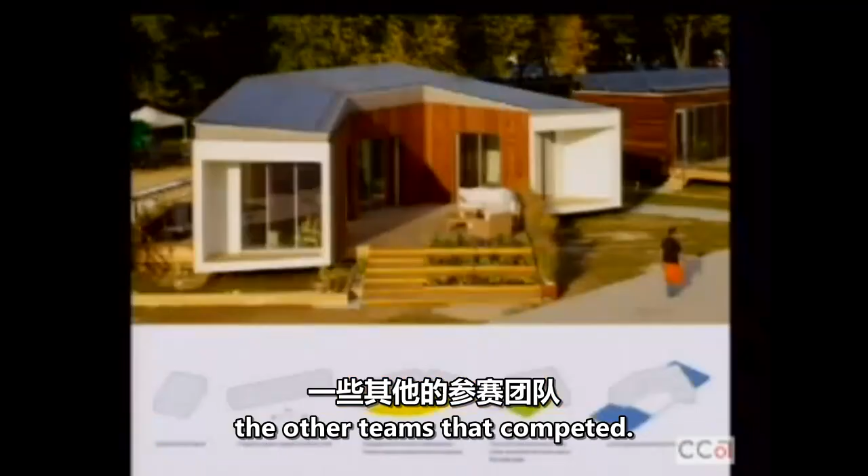Our house was made up of 3 modules, and if you looked at some of the other competitors, they're pretty much boxes, with 1 or 2 exceptions in this year's competition. They're rectangles, and there's something to be said for the rectangle in terms of efficiency and modularity for transportation. But we tried to take those 3 shipping modules and bend them around the central courtyard you see here, really promoting the central courtyard space, thinking of that as the 4th room.

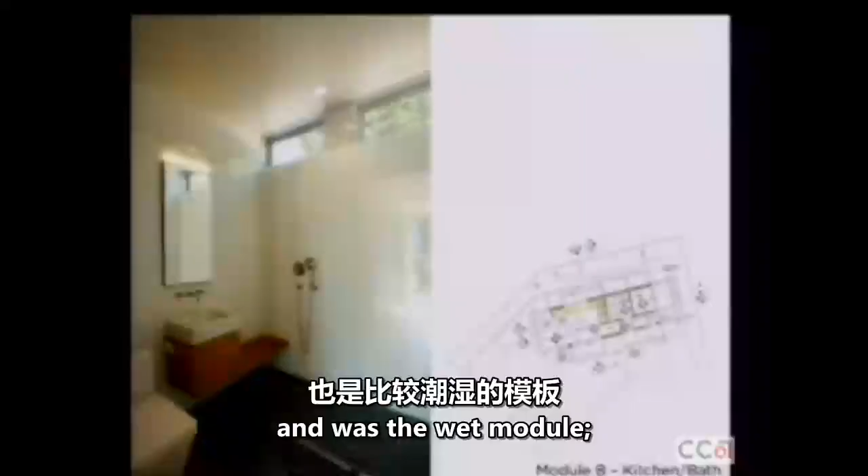So each of the modules has a primary living function, the courtyard was the 4th room, and each of those modules opens out onto that courtyard. The courtyard then extends the landscape and makes the site on the mall, which was kind of a tabula rasa in many ways. So 3 modules: Module A was the living room, opening out to the courtyard. Module B was the kitchen and bathroom, as well as the mechanical room, and was the wet module. Module C was the bedroom.

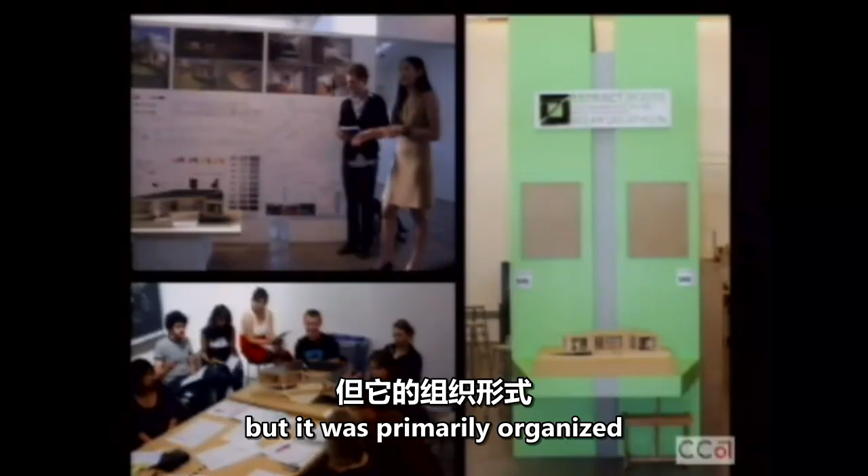This was a process that was 2 years in the making. There were a number of different studios and classes that both directly and indirectly worked on the project, in small scale seminars as well as studio courses. We actually took over a part of the nave and were allowed to paint it briefly - not a very nice color, but it was identifiable - and so we created a real identity through the teaching of the courses. Our partners in the project, Santa Clara, used it as an extracurricular activity for their students, and there was certainly a lot of extracurricular involvement from our students, but it was primarily organized through the teaching functions here at our school, which was an interesting part of merging things together.

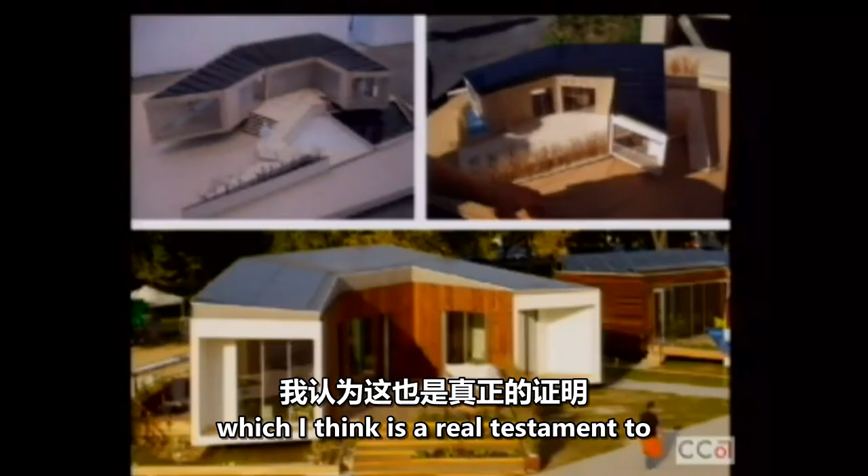So to start with the idea of how directly it evolved: from very early conceptual models in the very first studio, taught by Andrew Cudlis, and the student projects that came out of that, it went through a number of permutations. The interesting thing is how closely the original concept stayed, which I think is a real testament to the strength of the original concept of the house - the bending of the house around the courtyard. Going from the original conceptual model to the final built structure, there are many changes, and Kyle will take you through a few of those. But through all those changes, and all of the different hands of the hundreds of people who worked on the project in a collaborative, creative way, we ended up with a project that flowed very directly from the original idea.

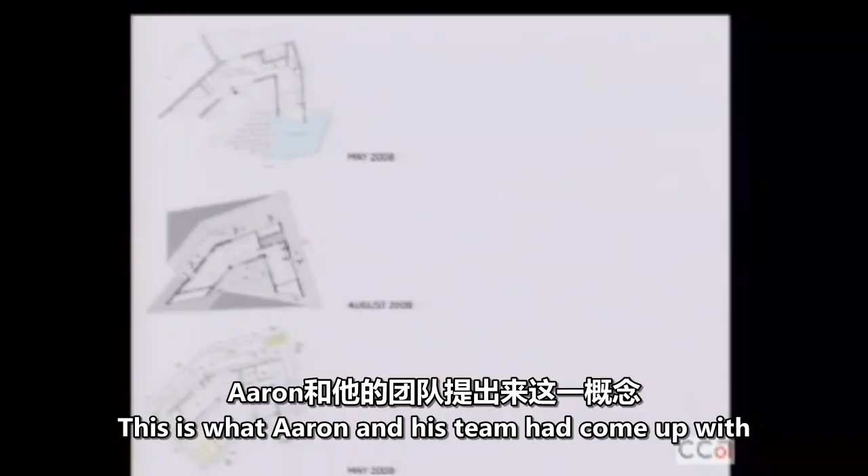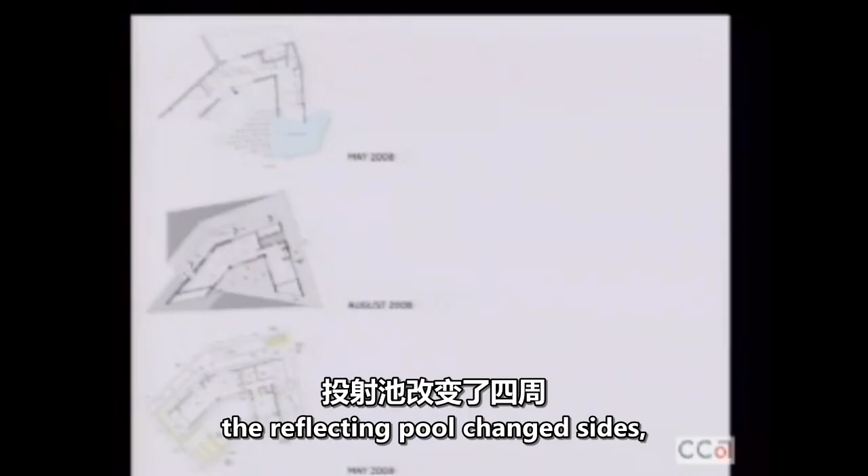The evolution of this project over its 2-year life here at school: looking back to May 2008, Aaron Ports was the source of the original concept, but many hands have augmented that initial concept. This is what Aaron and his team had come up with at the end of the May studio. Then in August, we started looking at some of those proportions and sitting down with the engineers to talk about envelope. We changed the entry, the reflecting pool, changed sides. We went to a one cantilever scheme at this point. The width changed, the end cap angles changed a little bit, and the landscape changed dramatically - and then to where we are today, with the landscape changing dramatically yet again.

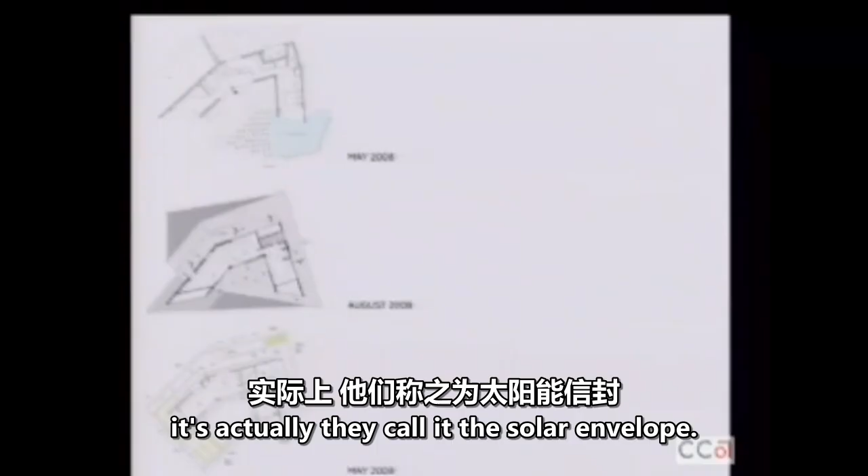The modules are now a little bit wider. Because it's a kind of zero net game, we're limited to 800 square feet, and that 800 square feet is not conditioned space like we traditionally think of for square footage - it's actually what they call the solar envelope. So it's what casts a shadow or what can affect the energy performance of the building. Any overhang or canopy counts against your square footage, so we maxed out that square footage. We're right at about 790 square feet, including the thickness of the skin. So when we changed the module size, it affected the angles of those end caps and every other relationship, and so it slowly became real.

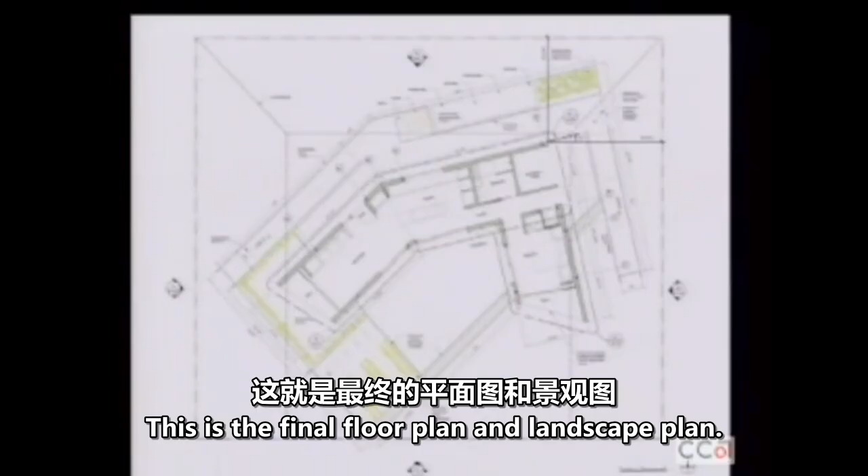This is the final floor plan and landscape plan. One of the ideas that...

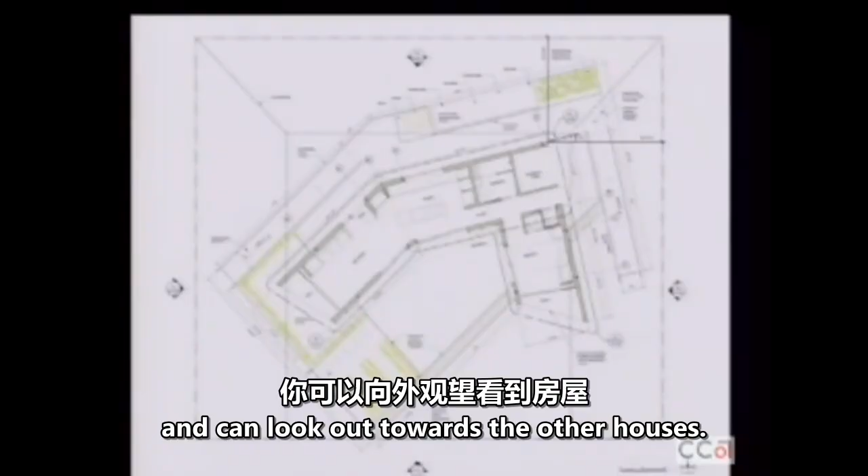Was one of our strong suits that we brought on early in the design process was moving the entry to the north side. When you look at some of the other houses and how those 1,200 people move through the house per hour, a lot of the front doors are off of the main avenue, which basically conceals the house from the public. By wrapping that line along the back, it preserved that view for the general public as they're walking down, and had that kind of eureka moment when you walk through the front door and get on that deck and look out towards the other houses. There's a number of thoughts and considerations that went into each of these moments, but that was one I was really happy we preserved.

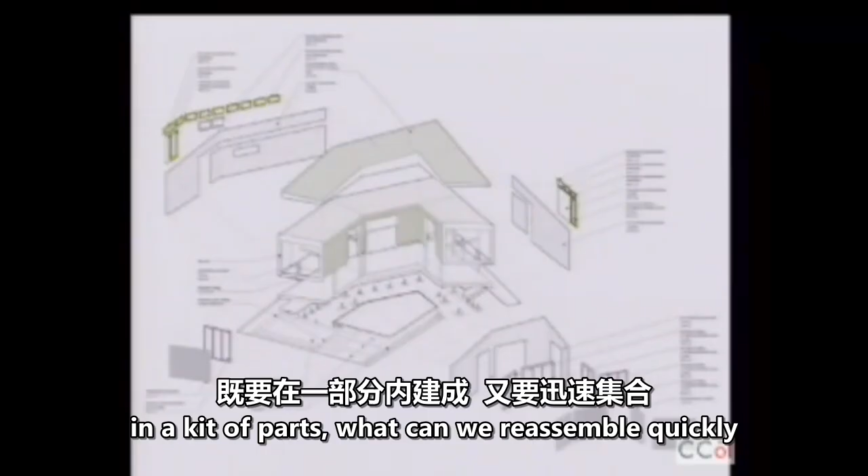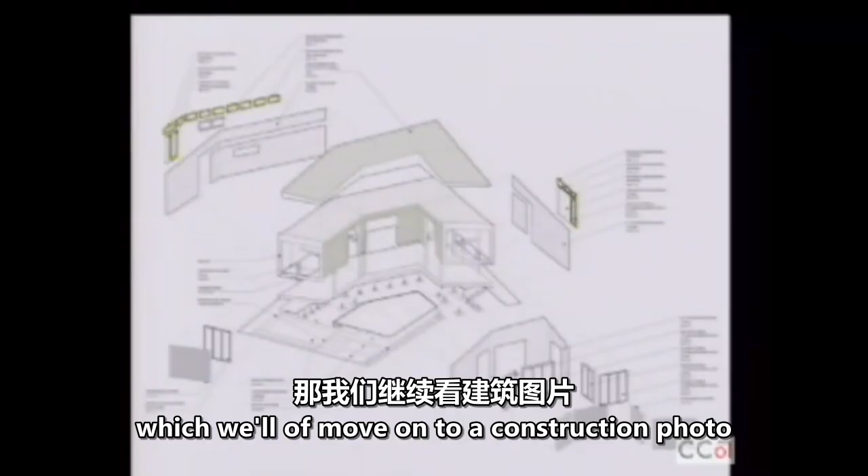Going through the construction, the diagram of how the house is assembled, it's a series of both modular strategies and strategies of getting the house as finished as possible in Santa Clara. Because we only had 4 days for construction, we had to balance what can we make in a kit of parts, what can we reassemble quickly, and what has to be done in Santa Clara. You can see the modules connected here, and then a lot of these are the parts that get assembled afterwards in DC, such as the shades, the skin, which we'll move on to a construction photo and show the house naked, if you will, as well as the clerestory windows on the north side, and then the sliders here on the south that open out onto the deck.

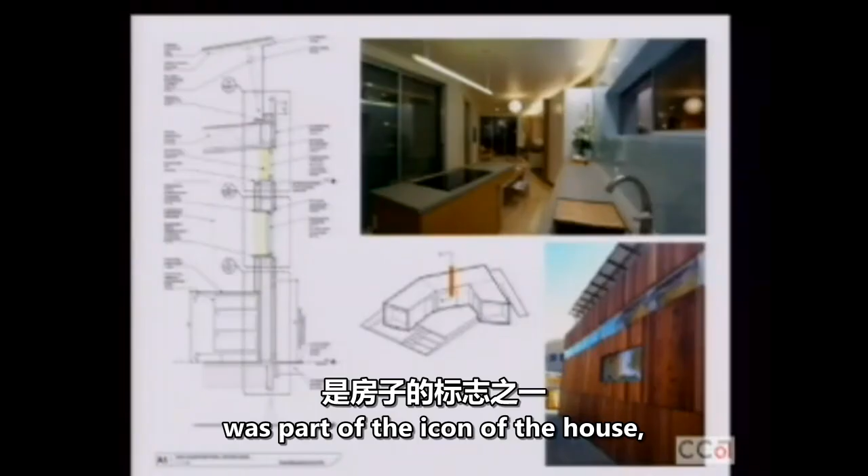Was that color and texture of the screen, made from California redwood, which actually has a fairly interesting story. It's sourced from a factory that was badly damaged in a fire about 50 years ago, and so we took that wood that had been damaged and replaned all of those pieces down and cut and milled it ourselves, and assembled the screen that you see here, really capturing that California vernacular of that redwood to skin the outside of the house.

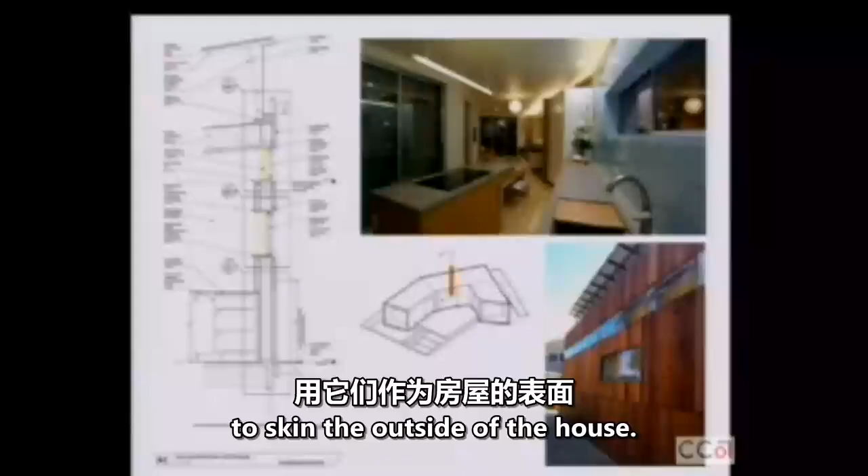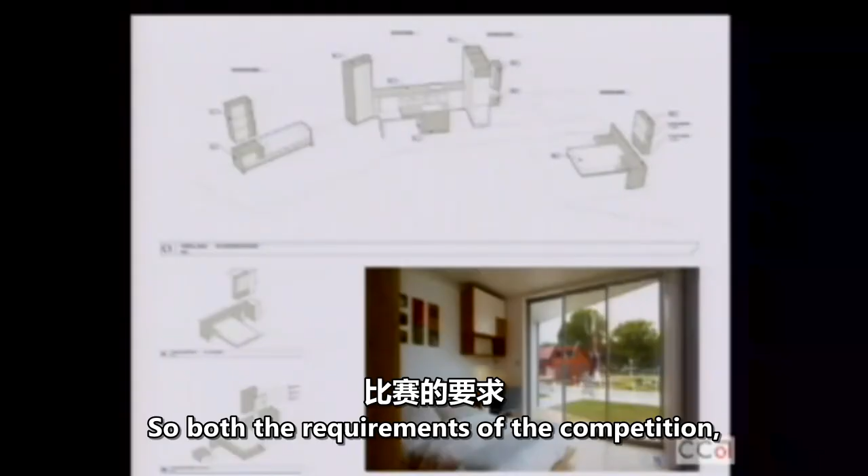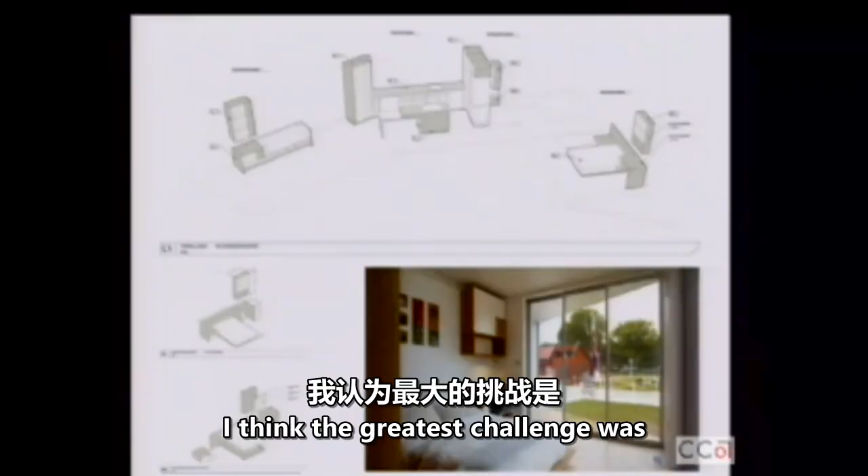I was going to say a few words about this. One of the things that I was most pleased with how well the team did was being able to balance many different competing and complex requirements. So there's both the requirements of the competition, which we'll talk about in a few minutes, some very specific requirements of the competition, the requirements of being able to ship the building in parts from here in California to Washington, D.C. and reassemble in a short amount of time. But I think the greatest challenge was making this small house be a really wonderful place to live.

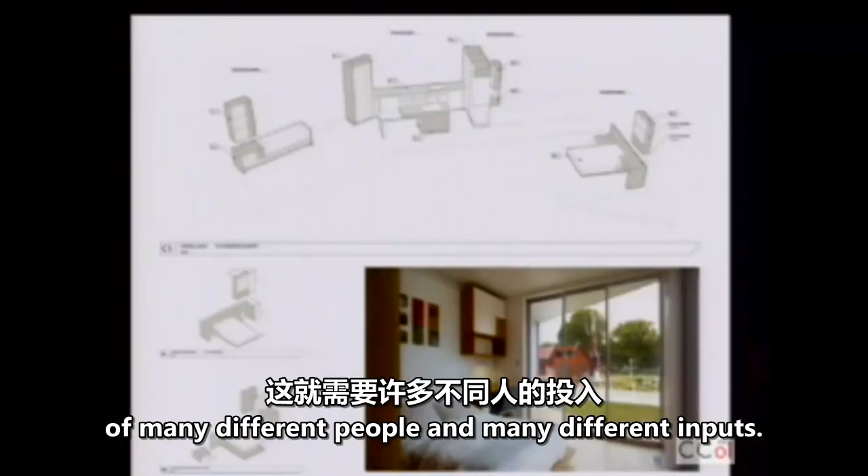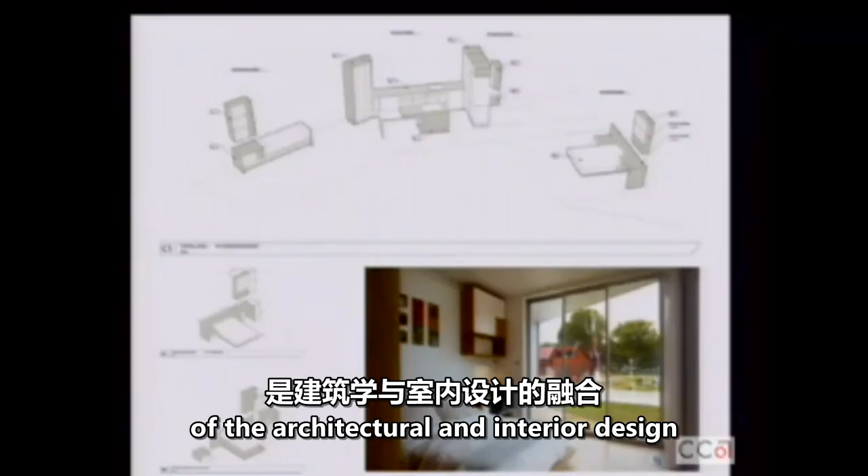And that required the input of many different people and many different inputs. So the slides you see here are related to one particular concept that was developed very strongly, the thickening of the back wall. It's a small, simple building, but the students put together this concept of the thick back wall with much of the furniture built in and developed out of that. So this is very much an integration of the architectural and interior design and furniture design components of the house. You can get an idea here in the three different modules: the living room module with furniture here, the kitchen module area there, and the bedroom module. By wrapping it around in that very clear diagram of the house, it ended up feeling much bigger, and I think that was a key element in achieving #1 in the architectural category.

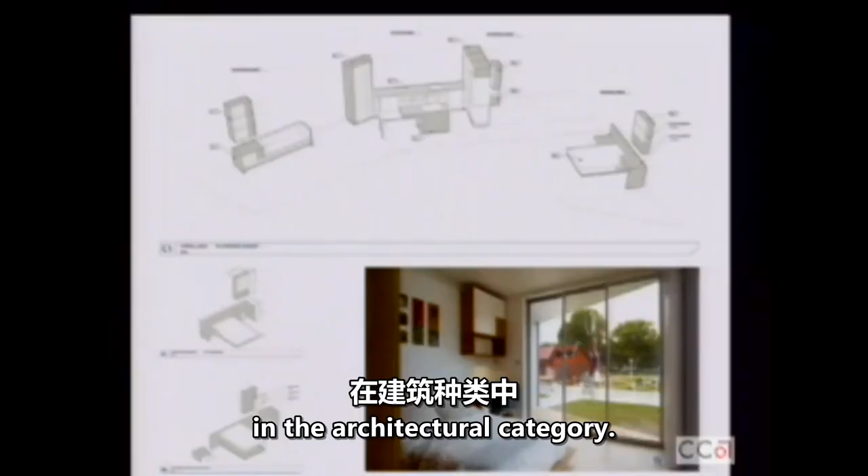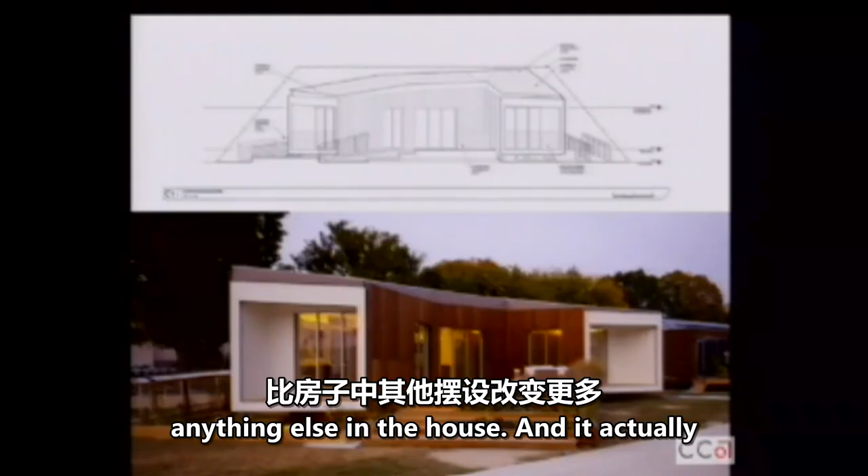The other primary aspect that I think is particularly unique from an architectural point of view is the integration of the landscape, the interior and exterior spaces, which went far beyond just the idea of the enclosed courtyard. That enclosed courtyard was an excellent starting point for the idea, but as the different semesters and studios engaged with that, the landscape decking, the layout, and the overall plant selection changed more times than anything else in the house. It actually benefited with each one of those changes. It was very much studied, and I think the final development of the exterior part of the house was also a really key element in the strength of the resolution. Kyle referred to it as the fourth room, the outside.

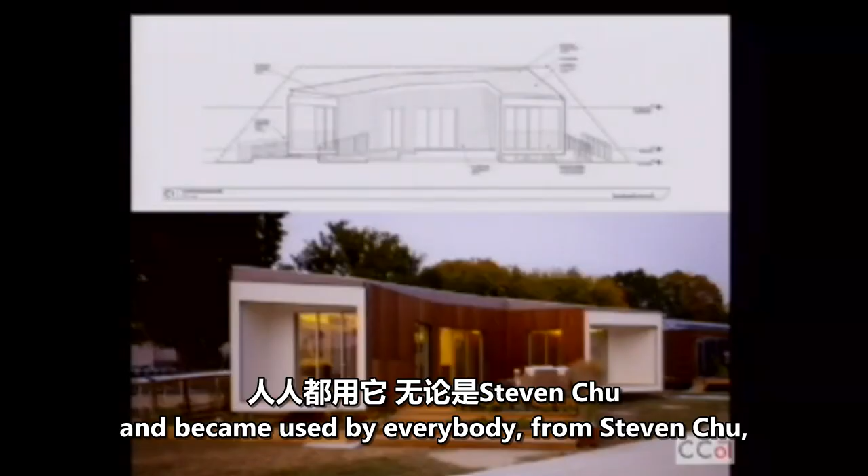It really was used that way during the whole exhibition and competition. You see the exterior, we've got the outside furniture, which was extremely comfortable and became used by everybody from Steven Chu, the energy secretary, to pretty much every visiting VIP would locate there, including our president and board members. Everybody wanted to just sit there and enjoy that space, which was really a wonderful part of the outside.

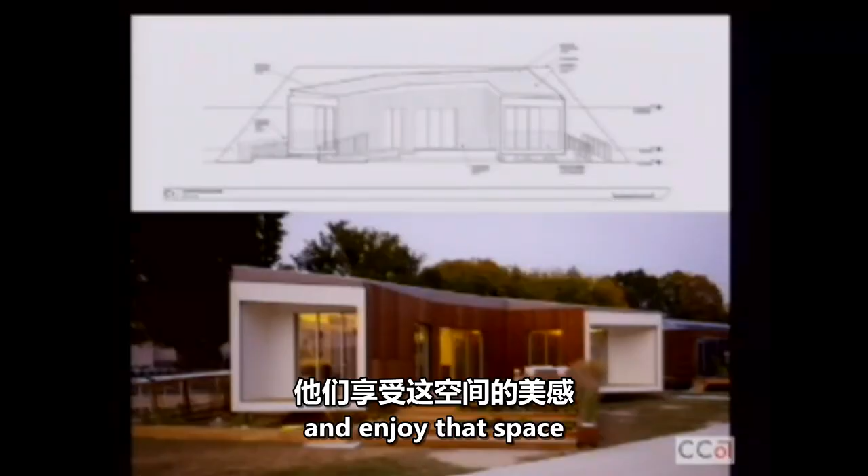One small note about that outside space. During the testing over the two weeks of the competition, we were limited to only having 6 team members in the house. So that outside room became the staging area for person 7, 8, 9 when they switched shifts inside the house. I'll talk about the competition strategy later, but it really became the hangout room because we weren't allowed to go in our house.

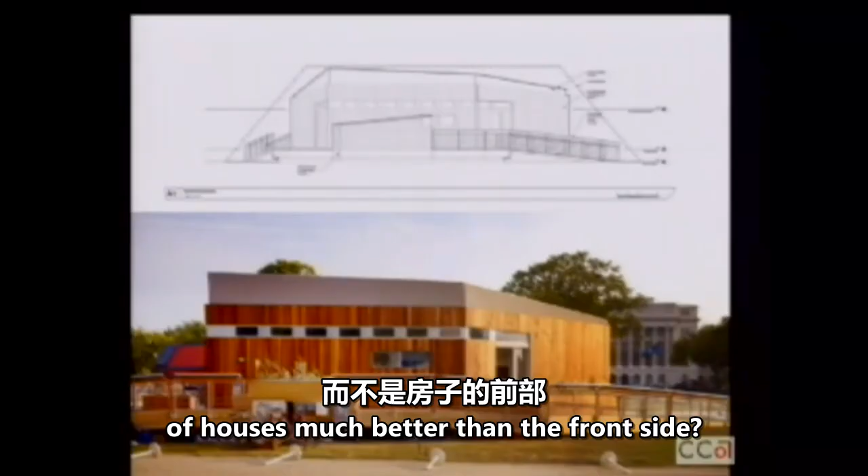This is the back side of the house, which I wanted to point out. I often, as an architect, like the back side of houses much better than the front side. The front side gets all the attention in the design, but it's often the back side that ends up having the nicest proportions, in my experience.

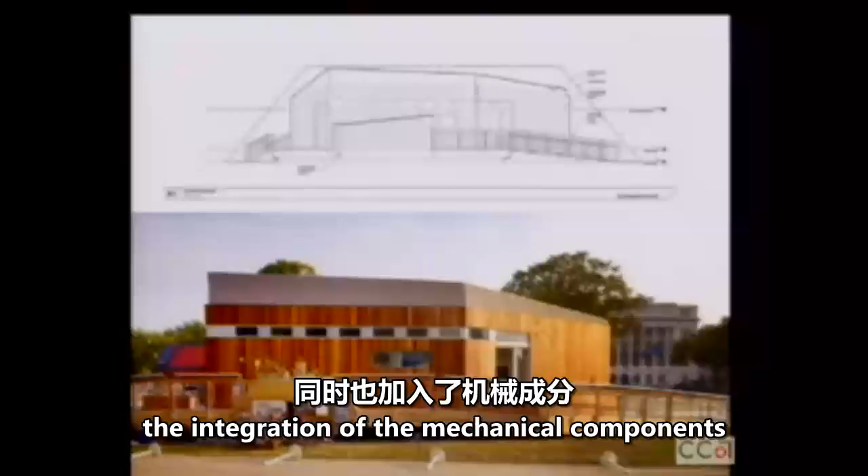But in this building, you see the way the ramp curls around the north side, as Kyle mentioned, and enters from the north side. There was a lot of thought in the secondary design of the deck, the terrace, and the landscaping — very thoughtful connection of all the outside parts of the building, including integration of the mechanical components and plantings. Along the ramp here, this is a very nicely done set of graphics that explains the house.

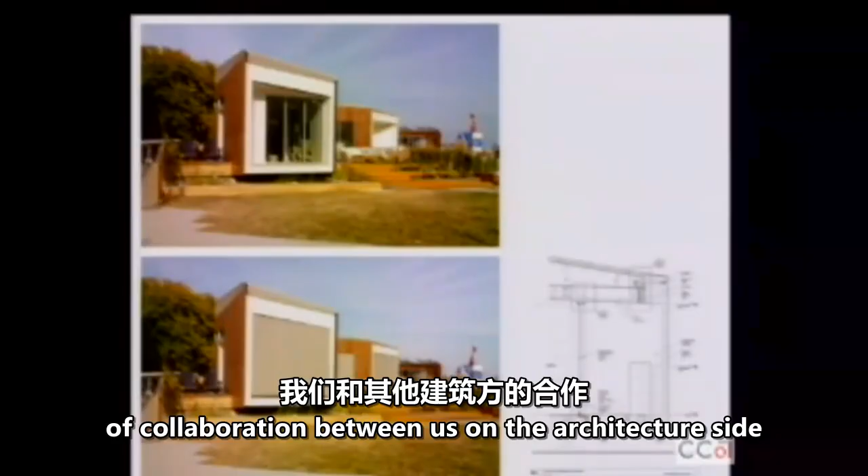During the long waits, and our house had the longest waits I think of any of the houses, people had a very nice introduction to the house through the graphics and the whole integration of this entry point. Those graphics became one of the moments of collaboration between us on the architecture side and the graphic designers, with a lot of going back and forth on proportions.

We also had to deal with the slope of the site. Because we didn't have a true survey like you'd have on a normal construction project, Oblio had to design the flexibility of the system to handle multiple slopes. So there was constantly feedback to the graphic designers and fabricators as to what the proportions of those panels were, how to integrate them on site, and how to fabricate them quickly.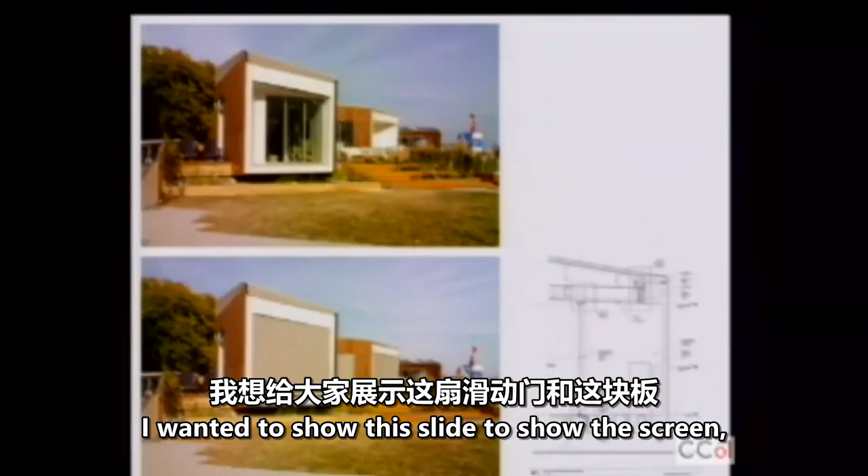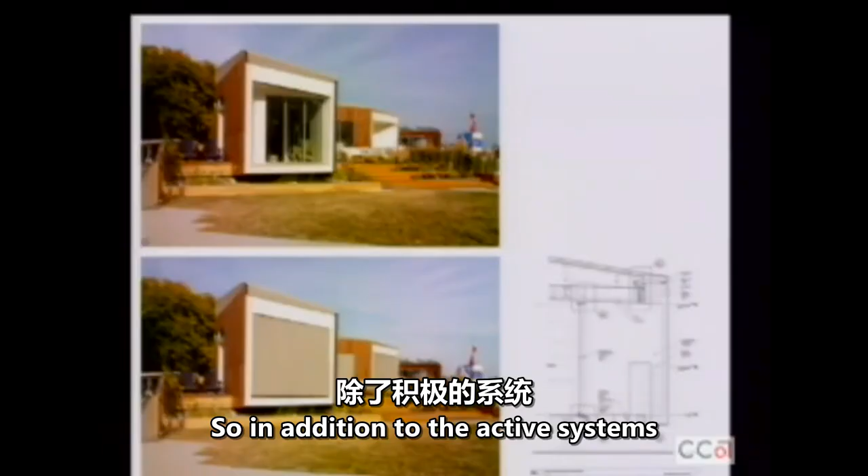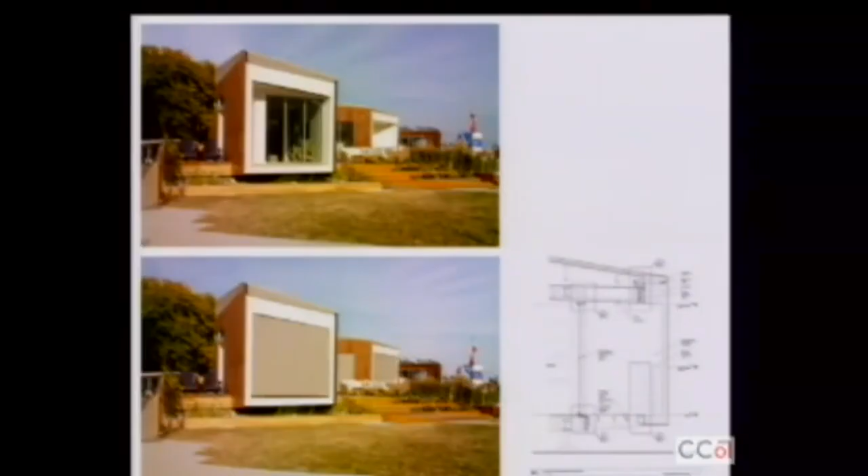I wanted to show this slide to show the exterior screen and talk about some of the passive systems of the house. In addition to the active systems like the solar panels on the roof and some other technology, we wanted to embrace as many passive strategies as possible to cut down on energy use, which is part of the competition. By having multiple sliders as well as exterior shades, there are multiple combinations and permutations you can achieve depending on relative humidity and temperature outside — you can open the sliders but close the shades, for example.

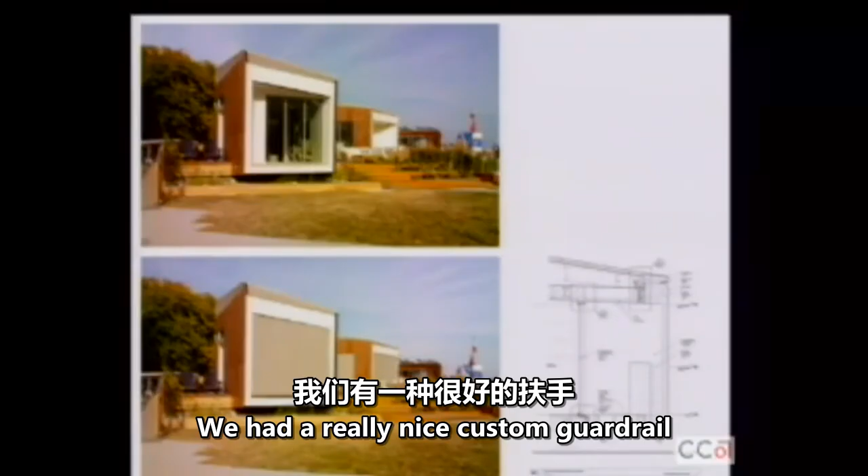The other thing I wanted to point out, seen in the section, is the cavity the screen comes down from, as well as the handrail — two late design changes. We had a really nice custom guardrail built for these end caps because we weren't sure what the slope on the site was. But it turned out our finished floor was below 30 inches, so at the last minute these custom fabricated guardrails got pulled off the house.

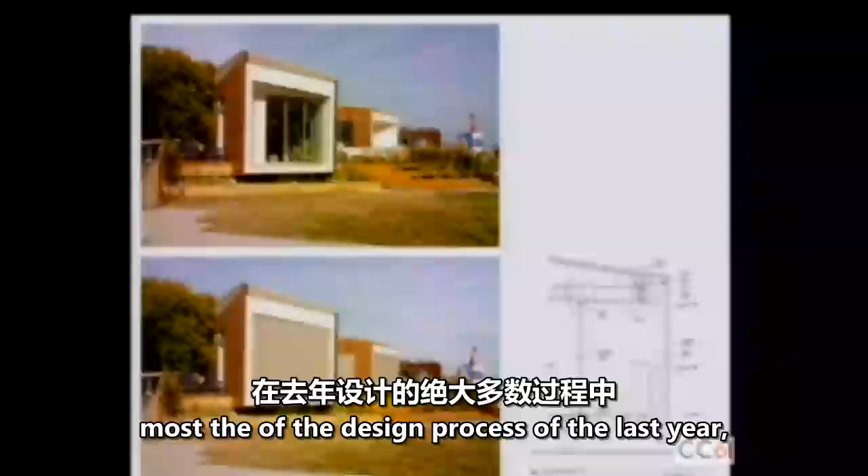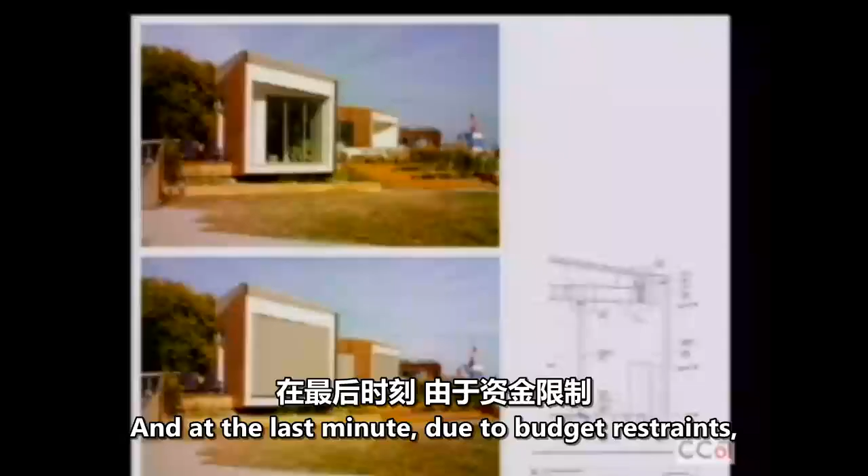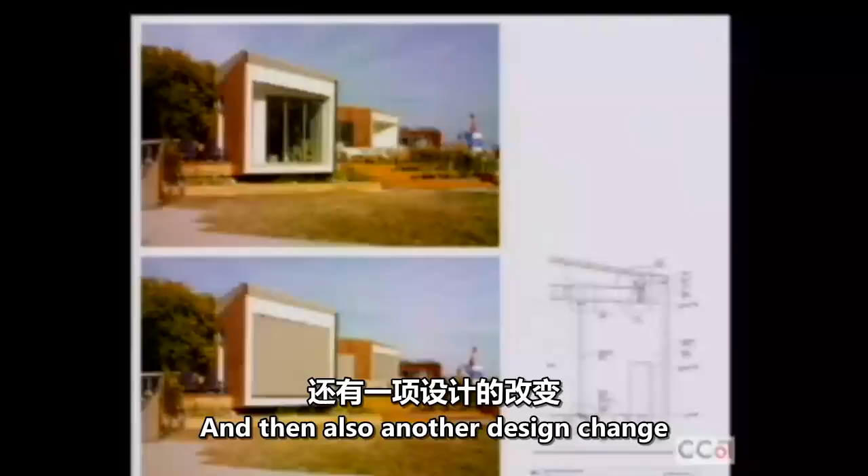Also, that cavity — during most of the design process over the last year, we had imagined it having solar shades or solar louvers with thin film PV, an operable screen. At the last minute, due to budget restraints and limitations from DOE, it got swapped out to this fabric you see here. Another design change that happened subsequently is what we called the PV skirt, this area here — there was a constant debate about what to do with that space.

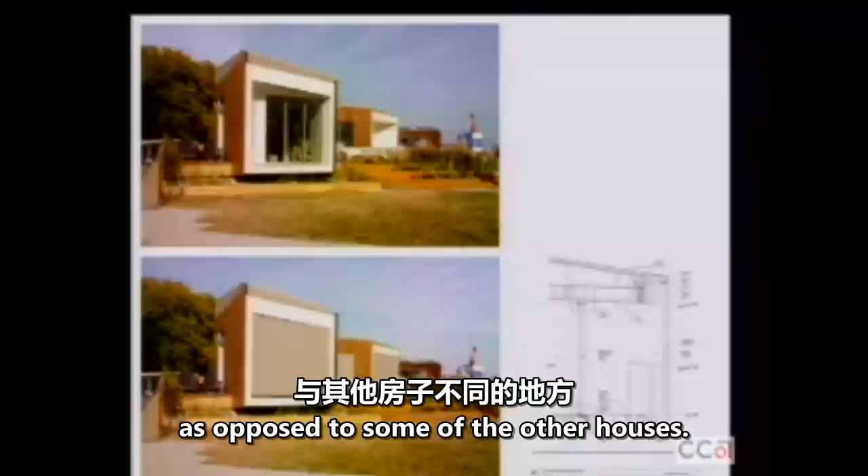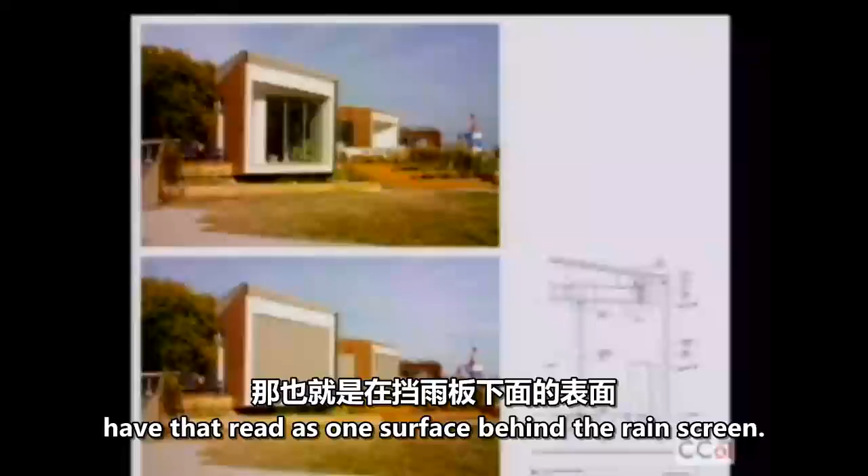The reason we needed that space was shipping restrictions, since we're limited as to the height of the module that would fit on a truck. We'll show some of those truck photos in a minute. The strategy was that the module arrives and then a racking system props up the solar panels, and you have that cavity that we wanted to conceal to provide an integrated look, as opposed to some of the other houses.

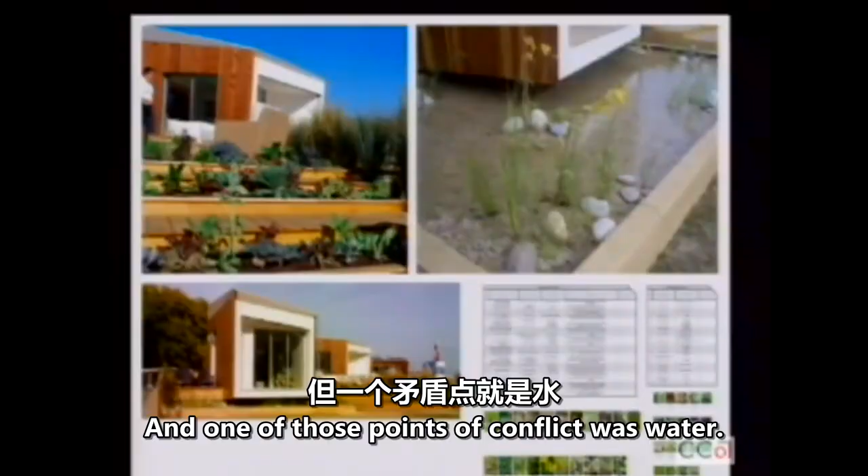This highlighted one of the challenges in the competition: building code and local code. We had to meet Department of Energy code, and sometimes it was DOE code that took precedence, sometimes District of Columbia code, and sometimes California code. One point of conflict was water—California's water code is more progressive than DC's. On our final site in California, we'd be able to use that filtered gray water to irrigate the edible plants, but in DC we weren't, so we were dealing with multiple levels of bureaucracy and rules, having to figure out which was most stringent at any one point.

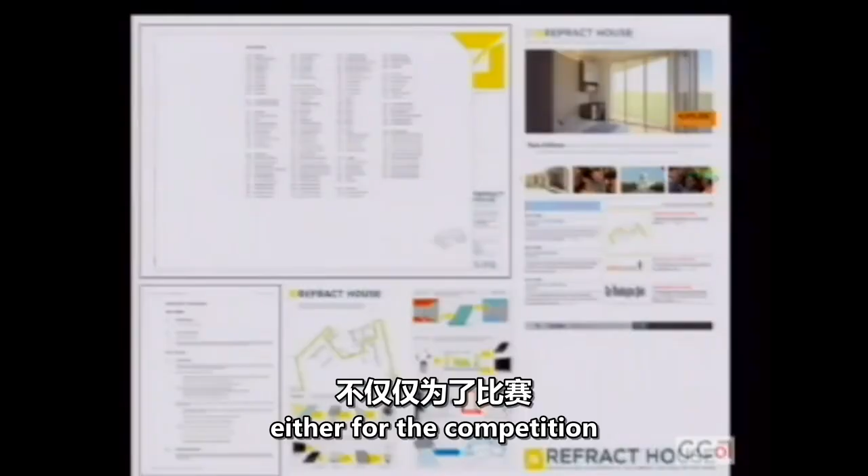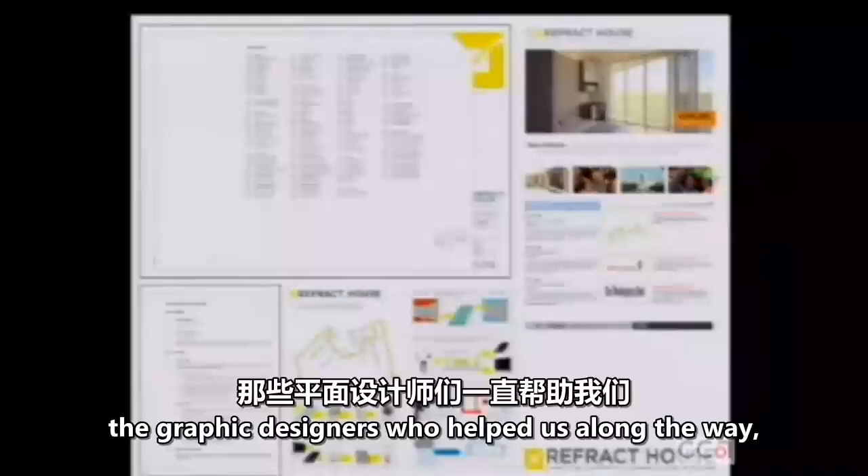Special shout out to the graphic designers who helped us along the way. On the top left is the final sheet layout, and over the two years the sheet layout evolved many times. With the work of one of the graphic designers, we were able to come up with a sheet, a title block, and a brand identity to our project and team that I think is fairly successful.

I also pulled one of the G sheets to show how many drawings we had for an 800 square foot house.

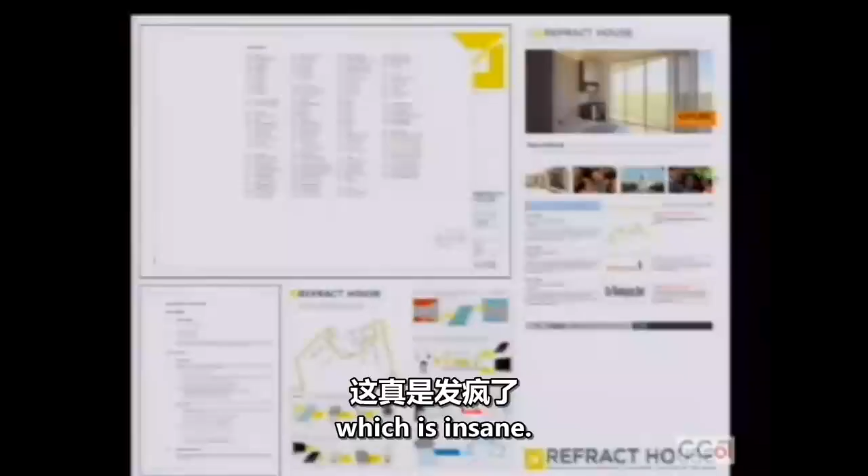So it was 150 drawings for 800 square feet, which is insane. Other aspects we had to do as students that we don't necessarily have experience doing, but trial by fire, were the specifications. This is a sheet pulled from the specs. I don't remember which category, but we had over a 120-page spec that was part of a 600-page project manual we had to assemble while finishing construction drawings and doing construction.

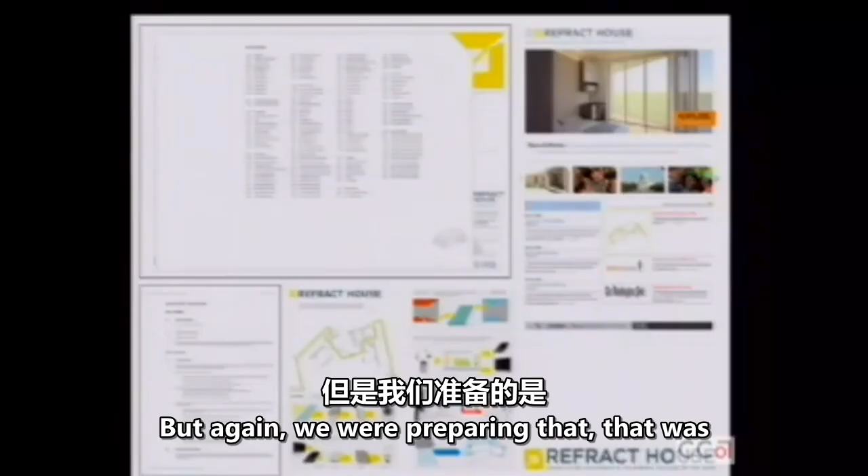And then other screenshots here. The web page, it's a screenshot of the front page. I'm sure many of you have seen the website, but again, we were preparing that. That was Preet Anand, who's actually an engineering physics major, along with a bunch of architects and one graphic designer, putting together a website with supplemental work from a lot of other people, but a lot of it was learning on the fly.

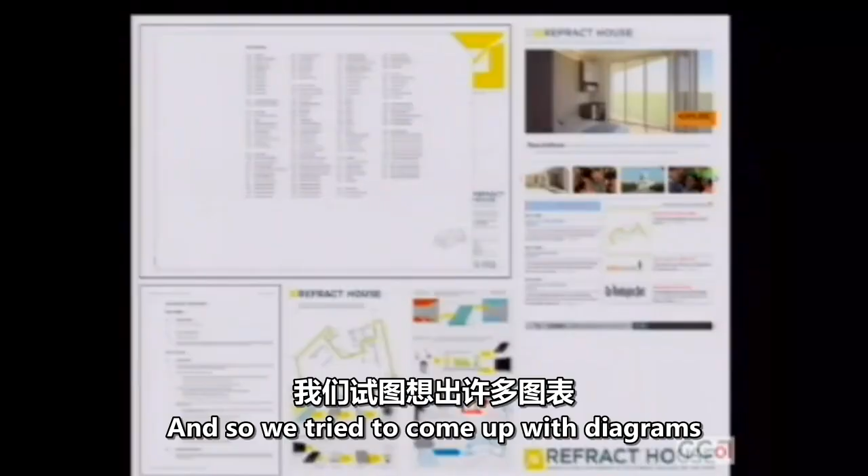And then lastly, these two images on the bottom are pamphlets we handed out during the tours, which was part of our communications component to the competition. We tried to come up with diagrams that explained some of the systems of the house to the general public and educate them in a friendly way. So that was, again, architects and engineers trying to teach those systems to graphic designers so that they can create graphics that the general public can understand.

I'd also like to call out the different disciplines that helped out on the project, and the individuals who contributed art, often at the very last minute, to get it to DC. Travis McFlynn did the ceramics, which you can see here in the bottom corner. The ceramics were an interesting story because it used clay harvested from San Francisco Bay, and then he takes recycled wine bottles, crushes them up, and uses that ground glass as the enamel. So the green color you're seeing from the plates is from recycled wine bottle glass.

Just trying to go in some kind of order here. We also had a student who did the glassware, again using those recycled wine bottles and basically re-slumping new glass. Matt Harvey did custom glass fixtures for us, one of which you can see here above the island. Julia Goodman did an art paper piece, though it's not seen in this shot.

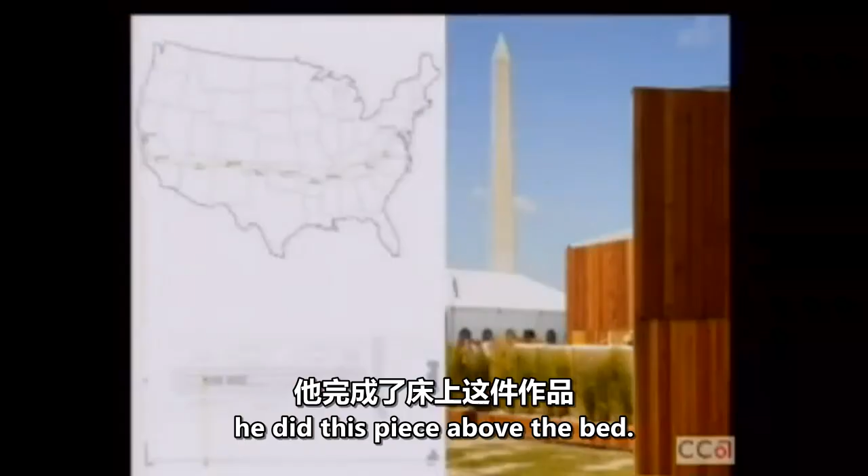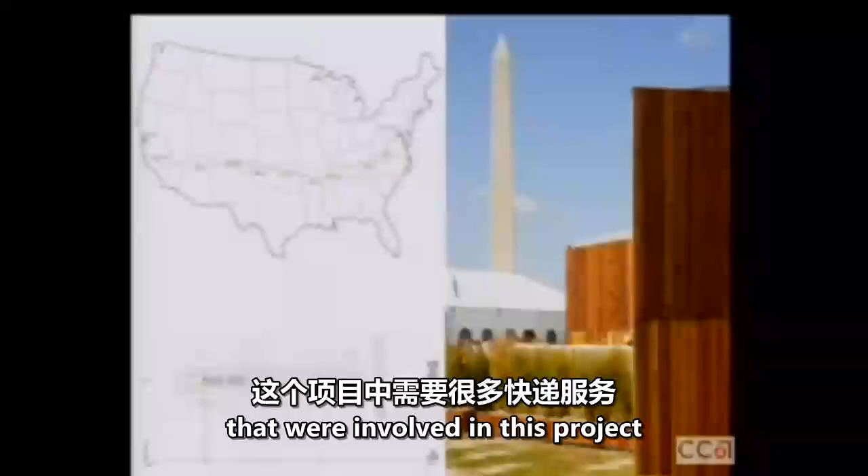So after we had designed the house, we had to get it to DC. I wanted to show this map of the U.S. because there's a level of logistics involved in this project that's not necessarily seen at first glance, such as all the sliding doors in the house actually having highly engineered glass. On the south face it's argon-filled glass, and on the north side it's krypton-filled glass. As you can imagine, that pressurized gas doesn't travel well over the Rocky Mountains.

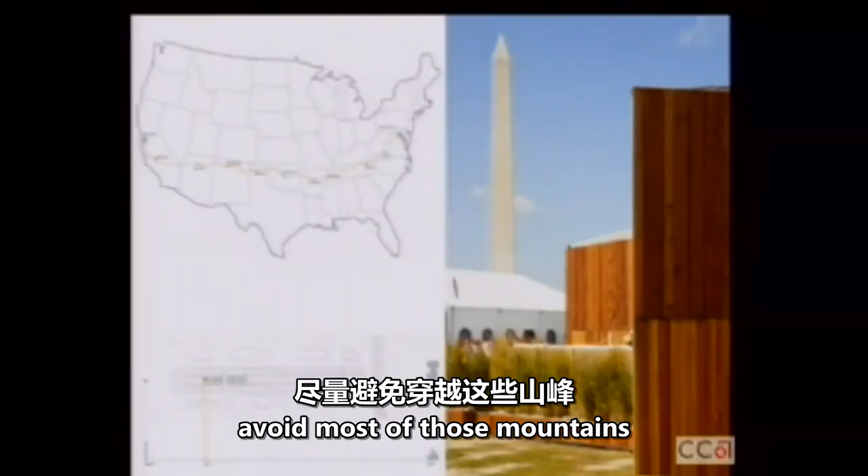So we actually had to avoid most of those mountains by driving through Arizona, which lengthened the road trip for our house, which again factors into when we had to be ready to go from Santa Clara. So there's a level of logistics there that was kind of insane.

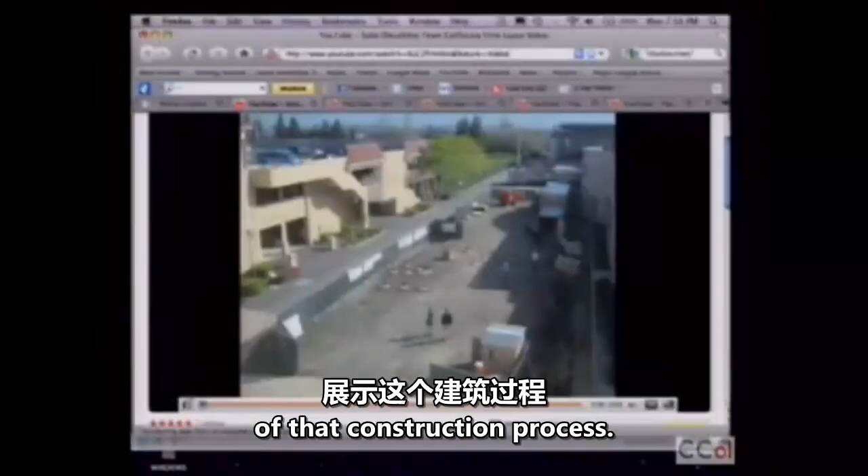And then a quick little diagram of where we were on the mall relative to the Capitol and the Washington Monument. At this point I want to show a quick video of that construction process. There's a 6-month window to do most of the construction, and then a 4-day window. I have two videos that show the differences between the two.

So again, steel moment frames that weren't needed for structural concerns in terms of a house sitting on foundations, but more for lateral stability on the 10-day road trip across the country. This is behind Santa Clara's library on their campus.

Primary structure was stick frame with blown-in insulation, as well as some blue jean batt insulation, and actually fiberglass as well. But the 3 modules were built together and then disassembled, which you'll see next.

Here's the racking system going up. What we tried to do with the solar panels and the racking system was make one plane of panels that was then integrated with the architecture.

The red you're seeing here is a vinyl billboard that was taken from a Clear Channel warehouse. These were billboards - vinyl's not recyclable per se, except it can be reused. So we added it as a second waterproof membrane to the sides of the house.

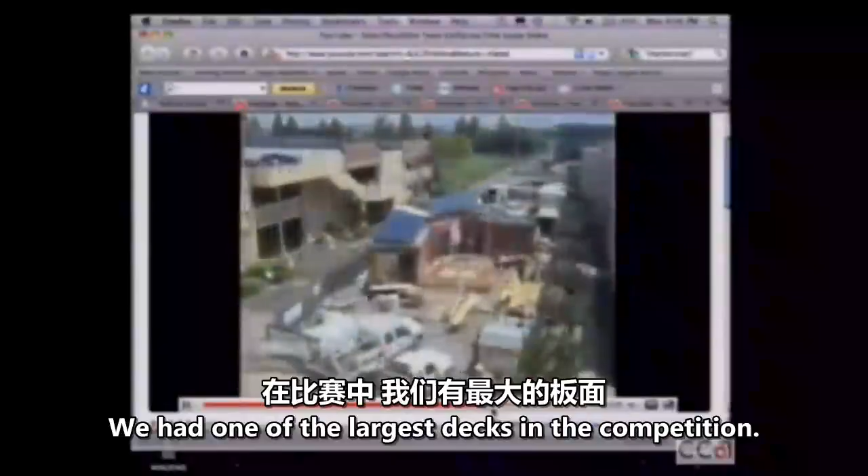We had one of the largest decks in the competition. In fact, our deck ended up at 700 square feet with an 800 square foot house. You could really feel the difference, especially with the courtyard and that terracing down with the garden. Everyone walked into our front door and instantly had a view out towards that deck, and they said, without even seeing the rest of the house, your house feels bigger than all the other houses I went into.

We were able to get far in construction in Santa Clara, but there was no landscape in, no pond in, the handrail wasn't built - because we didn't know some of the site restrictions - and so there was an element of surprise arriving in DC.

And I'm going to call up Andrew here to talk about that transition from Santa Clara to DC.

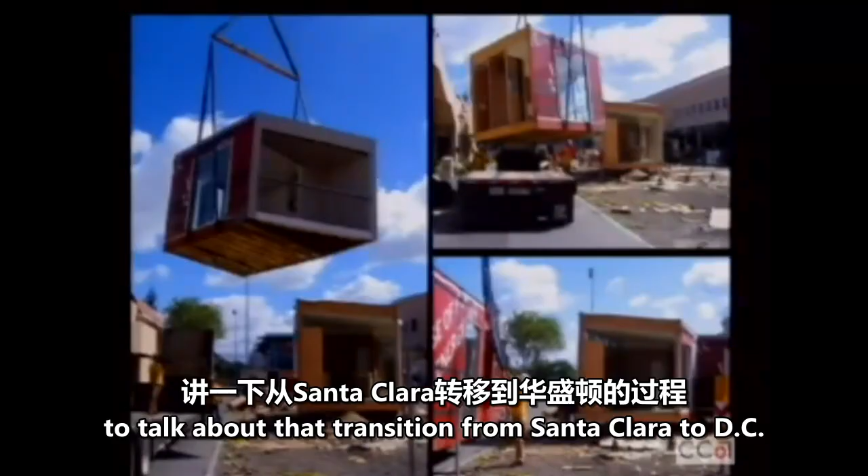Part of building a house that's not a box, when you're competing with people that are building boxes, is complexity. So there's inherent complexity to having a house that's got a lot of interesting angles and a lot more layers, essentially, of building.

So that meant when it came time to take it apart to ship it, there was a lot more we had to take apart than some of our competitors. This is our house - you can see how far away from its finished state it is as we're pulling it in Santa Clara to put on the trucks.

At this point, there were students, many of whom were risking failing classes just to work 14, 16 hours a day to get this thing done before we shipped it.

So then this is us putting them on the trucks that we hoped they would fit on. They were double drop lowboys, and there were points when, just to get the house low enough to go under bridges, the truckers and some of us were tampering with the air ride suspension on these trucks just to get them down another half inch so they could clear the overpasses.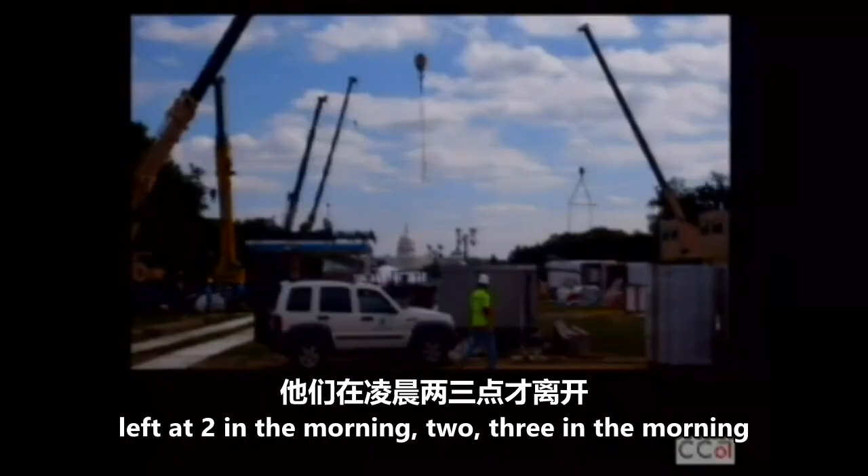One of the crazy parts was those of us that weren't part of that crazy 24-hour crew left at 2 or 3 in the morning after the first module had been set. We arrived again at 10 a.m. to relieve the crew that had worked through the night. What we arrived to was, I think at one point, 10 cranes fully erect on the National Mall, framing the Capitol, and then just organized chaos.

Going on the mall. And before I go to that next picture, I want to just show two videos.

Again, a 4-day construction sequence versus a six-month-plus construction sequence, and it really was organized chaos on the site. We had 25 students, and everyone knew there was always another task to do. It was show up and work as long as you can, go sleep, and then come back and do it all over again.

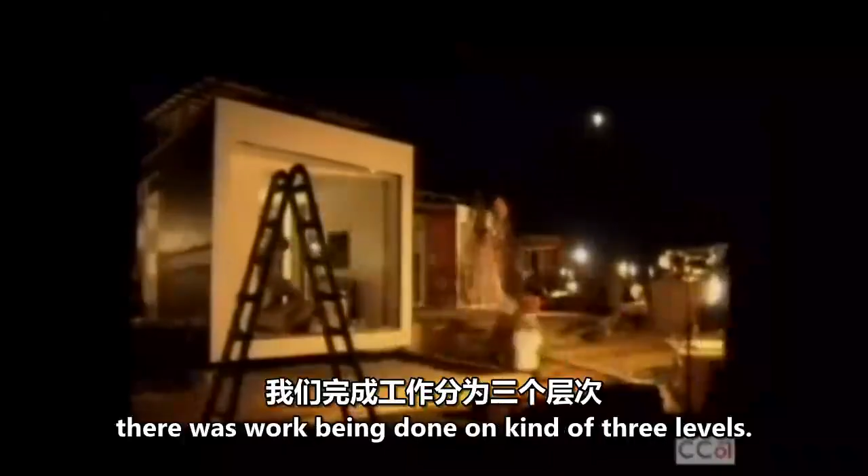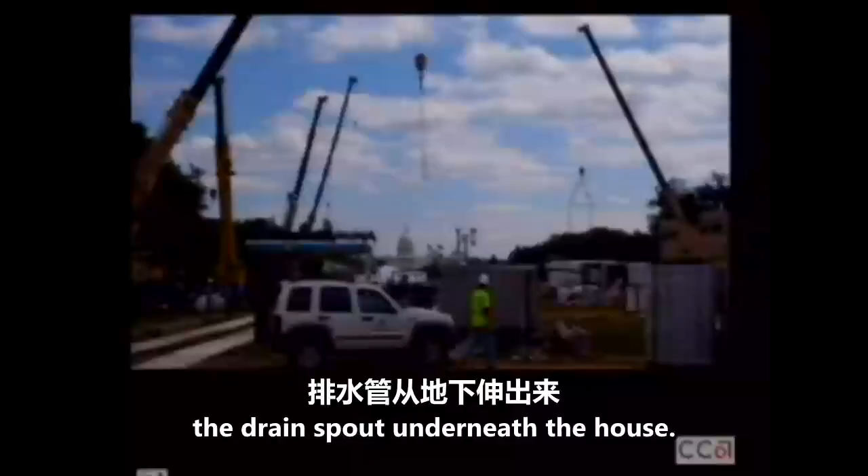Wash, rinse, repeat. There were times where there was work being done on 3 levels. I remember being under the end cap on the end there, hooking up the drain spout underneath the house. Meanwhile, there was someone standing less than 2 feet above me, sanding the finished deck with a power sander. And then there was someone on a ladder above him putting in flashing, and someone standing on the house finishing the racking system within one small section of a house.

Again, this is the morning after the night Andrew was describing. We showed up—or this might be late afternoon since the racking's up—but all 3 modules were already in place, tied together.

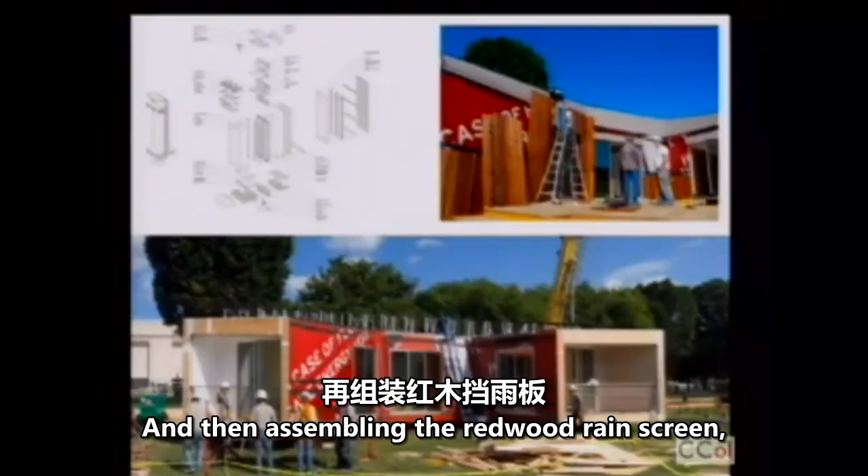Here you can see one of the exploded axons we produced for the construction set, showing the different layers, both interior and exterior, and then assembling the redwood rain screen. And here you can see how the PV skirt was tied in behind that rain screen.

I have one more video which I might abbreviate. It's 2 minutes long, but this is the arrival in DC and setting the stage. We got a little overzealous with monuments, but we really were a stone's throw from the Washington Monument in particular.

The weekend before I got there, which I guess was a week before we hit the mall, there were tents set up for a big national book trade show sponsored by the Library of Congress. The mall sees a lot of crazy events happen week by week, and we had a lot of locals come by asking what is this, where'd this come from. Here you can see some of the people working on top of each other, literally.

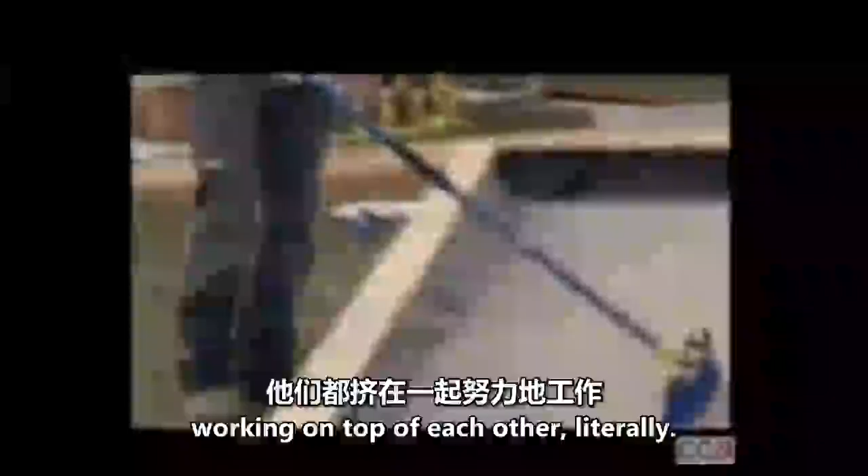Again, one of the challenges was the landscape strategy—trying to embed the house in this landscape—we had to fabricate a landscape in those 4 days, knowing we were going to have to take it apart again in 2 weeks. Luckily the safety inspector wasn't there to see no harness and no hard hat, but that's another conversation.

There was all levels of construction going on, from cutting stainless steel to finished painting happening at the same time. Alright, I think that's that.

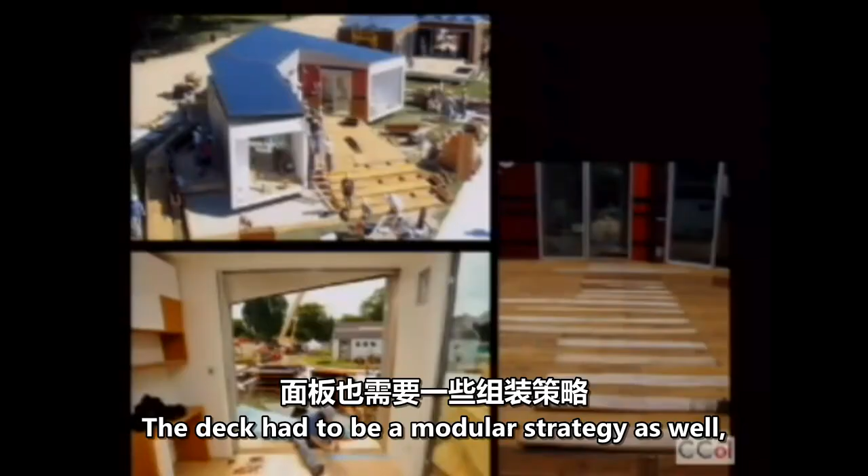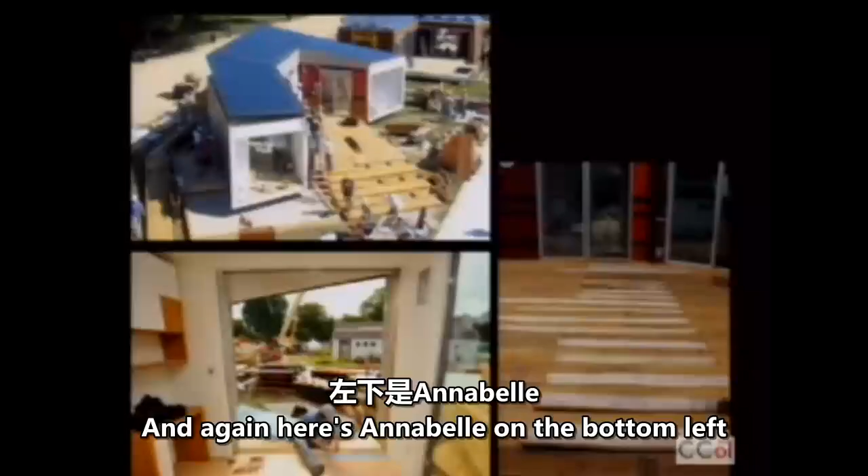I like this shot on the right because in addition to the seams of the modules, we also needed seams for the deck. The deck had to be a modular strategy as well, so there were template pieces to show how it fits together. We'd take out these template pieces, cut a new one, and sew it up so that the seam couldn't be seen. And here's Annabelle on the bottom left fixing a threshold detail that had also gotten damaged in transit.

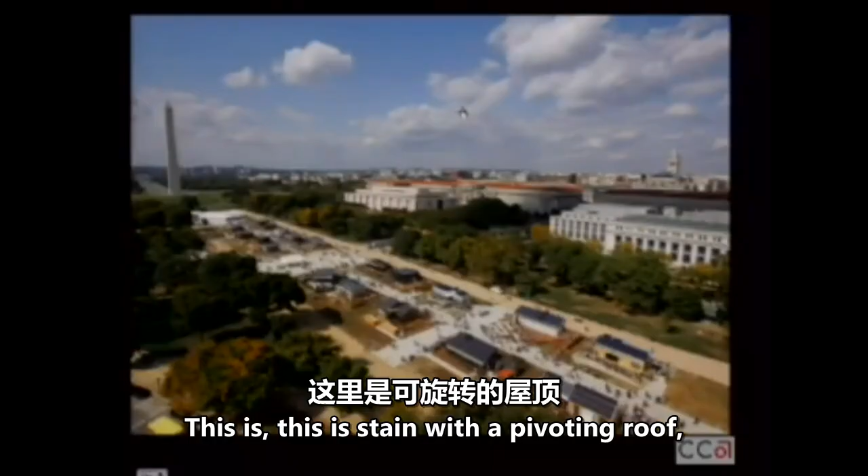This is one of my favorite shots because it shows all 20 houses, and you can see some of the different strategies employed. This is Spain with a pivoting roof, which we'll show in a minute.

So we scrambled to find hard hats, and while there were 50 people in the house, we found out that we passed final inspection. We hadn't been able to use any of the energy the house was producing all week until that moment, and an impromptu dance party breaks out, which I'll show a little bit of.

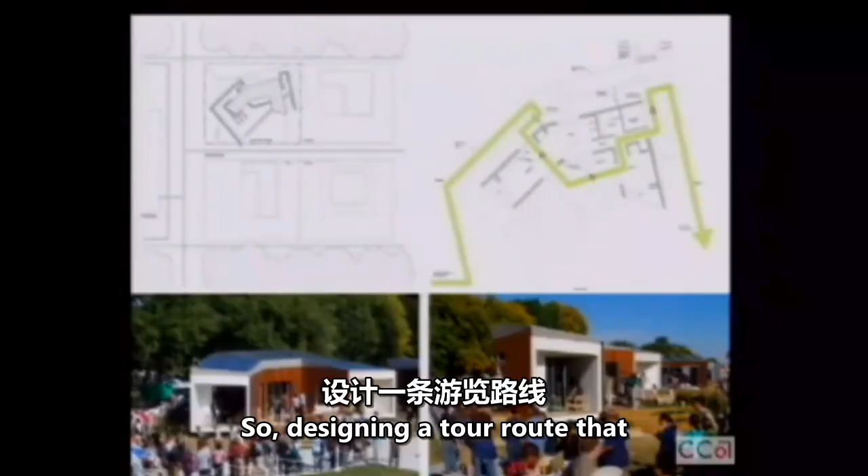One of the challenges of the competition was designing a house that felt livable, but also designing an exhibit. There was a Disneyland aspect to it - people were waiting sometimes 45 minutes in the rain to get into the house, so we wanted to move as many people through as possible. Designing a tour route without switchbacks or congestion points became critical. Again, just shots of people touring through the house.

We had to stand there in the cold, and I don't know the exact moment, but they announced the first place award goes to Team California. Complete shock. We're really proud of the job we did on the website and all the supporting materials, but it was a moment of complete shock, and also this idea that this was the second day in a row we took first in the competition. We were feeling good about what we had done to get there, so I wanted to show those two in contrast.

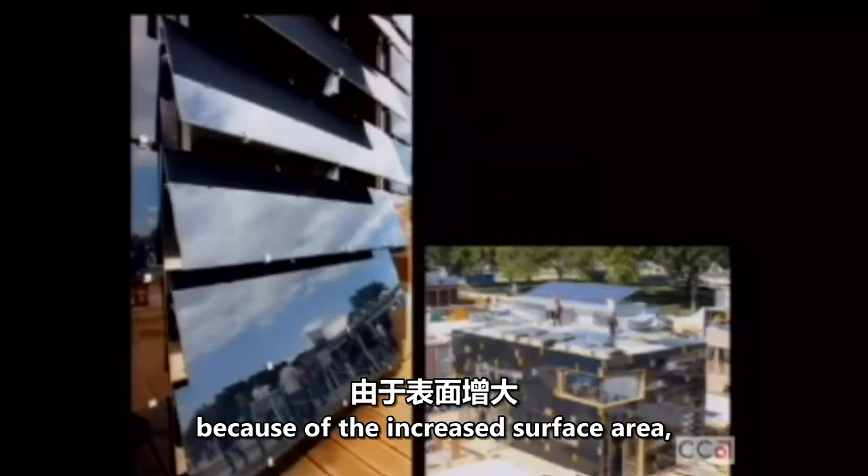Team Germany, who actually took first place in this year's competition, as they did in 2007, with a stacked strategy, and the entire house was clad in PV, as well as having PV on the roof. On those rainy days, the thin film they had, even on the north elevation, was producing as much energy as I believe they were on the roof, because of the increased surface area, and because they were able to take in power from indirect light. But you see their living space, they were able to take advantage of the double height, and they even had some interesting spatial tricks, such as a bed that pulled out over stairs that went to the lower level.

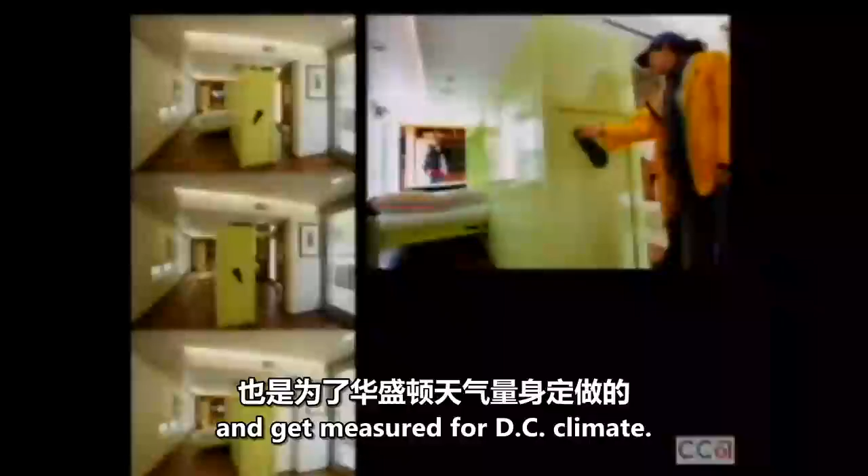One of their tricks, spatial tricks, was this green piece, which again had program in it. The bed actually pops out kind of like a Murphy bed, and the whole thing cranks away from the wall to reveal the bathroom behind the bedroom.

It was a little disheartening at that moment, but it turns out that they were actually late in finishing their house for final inspection, so they actually started at a disadvantage. How that happened, I don't know, but they weren't ready to go.